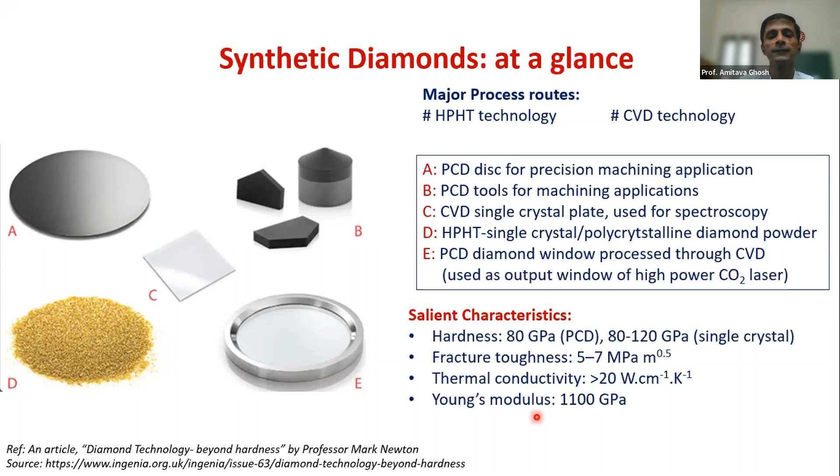More specific examples pertaining to today's lecture: you can see some of the cutting tools. Here are carbide tools, but at the tip of the carbide tools, the PCDs are basically joined.

You don't have to use the entire thing in the form of a PCD, because if you use the entire body as a PCD, the cost involvement is pretty high. So you just need the tip to be converted with excellent cutting capability.

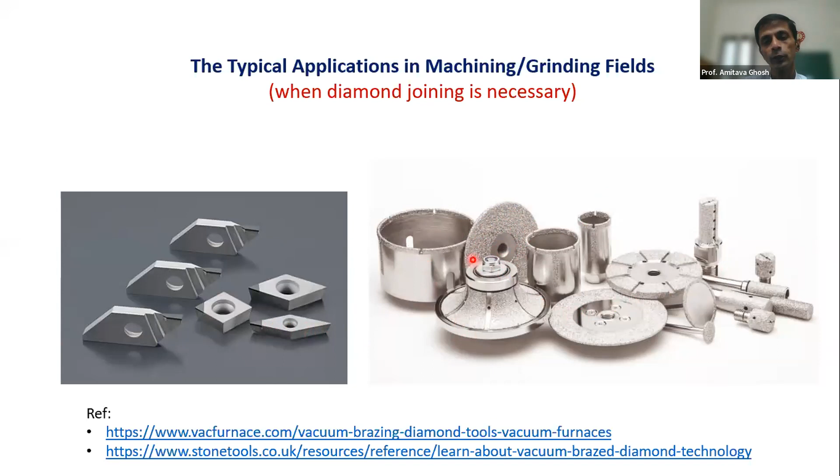On the right side, you can see several types of abrasive tools on which diamond particles are basically joined together. When we talk about this diamond joining, this diamond can be joined on a substrate in different ways.

Number one is very simple, ordinary chemical bonds, like a simple glue. There are a lot of extraordinary glues which can give a very good joint strength in ambient conditions. But when we use diamond particles as a cutting tool material or grinding tool, the involvement of high temperature will simply deteriorate the quality of the glue and it cannot hold the strength. So we cannot exploit the property of the diamond.

So we can also sinter diamond in a metal matrix. We can even press fit a large crystal of diamond onto a body of metal. We can use those kind of things in the dressing stick, which is typically used for grinding applications to condition the grinding wheels.

But apart from that, to make abrasive wheels like grinding wheels, two competing technologies are in the market: one is electroplating, another is brazing. Today we are going to talk about brazing. Unless and until we know what brazing is, we would not be able to delineate much detail about the assistance of laser technology into the operation.

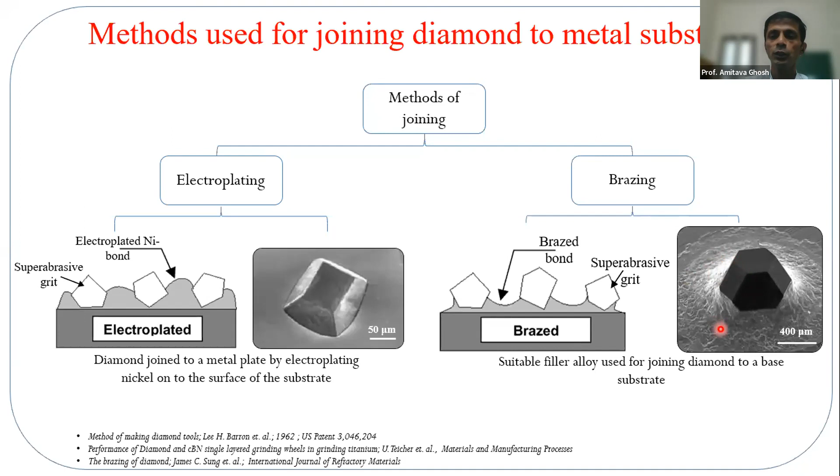In electroplating, it's simple: the mechanical joining of diamond particles to a substrate with the help of a nickel bond. The nickel is plated and it just covers a certain height. But in case of brazing, it's absolutely a metallurgical bond. So first of all, we need to know how we can really braze it.

For the brazing purpose, we need to understand the brazing system. So we are going to braze a grit with a substrate, usually a metal substrate. It can also be a cermet, which is basically a composite of ceramic and metal with a greater proportion of ceramic. And we have an alloy which needs to create a bridge between the grit and the substrate.

Depending on the source of heat, you need to melt this alloy. In the molten form, the alloy spreads on the substrate. It should react with the diamond, because unless and until there is a chemical reaction initiated between the grit and the alloy, it is very difficult to get the right strength.

Of course, to melt this particular alloy, you need a source of heat. We can have resistance heating furnaces, and we can have gas flames. We can have induction heating, and we can also use high-tech technologies like laser and electron beam.

We need a clear understanding of brazing before we see how laser can be a beneficial tool to take the entire brazing technology to a new high, where the process technology is advanced, product cost can be reduced, and cycle time can be reduced. So first of all, we focus on how diamond is brazed to a metal substrate.

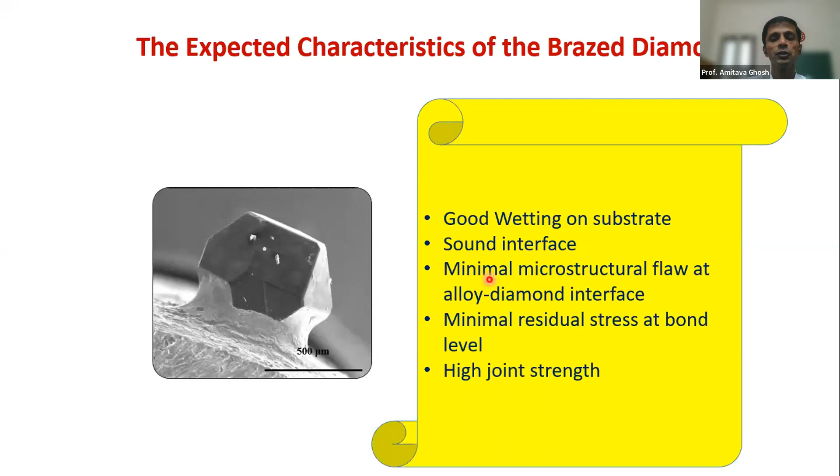And these things, as temperature is very much involved - say for example I choose an alloy that gets melted at a high temperature, it reacts with the diamond, but the moment I reduce the temperature to get the filler material solidified, what will happen? There will be differential contraction rates, so there will be residual stress. Let us look into those aspects.

First, I will present a case study of a very normal conventional brazing, which is industrially and commercially exploited to the maximum possible extent. That technology is nothing but high vacuum technology, which most of the time utilizes resistance heating as a source of power to melt the filler.

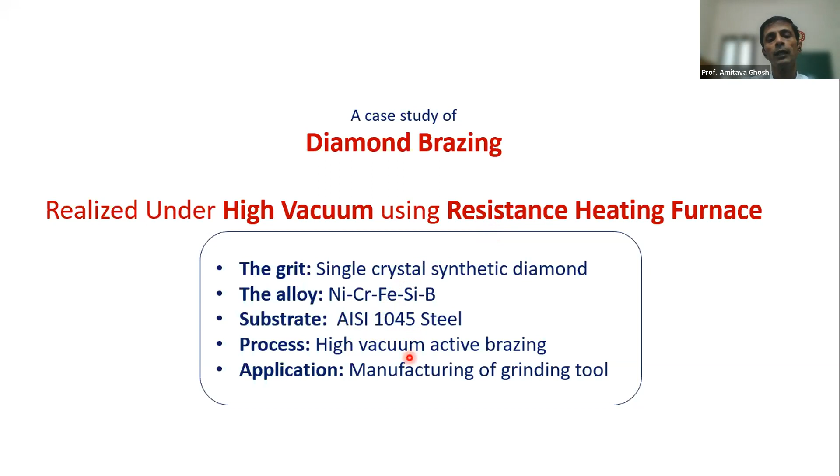In this case study, we choose a grit, which is single crystal synthetic diamond. The alloy is a nickel chromium alloy, which is quite hard when it becomes solidified. Substrate is just a medium carbon steel, and the process is high vacuum active brazing. I'll come to this high vacuum active brazing a little more in depth, then try to see how the laser can be beneficial. The application is basically manufacturing of the grinding tool.

As I said, there's a lot of metallurgy involved. We need to see how this filler material behaves when it joins the diamond with respect to the substrate. It is taken in powder form. Each globule you see is basically produced via the powder metallurgy route.

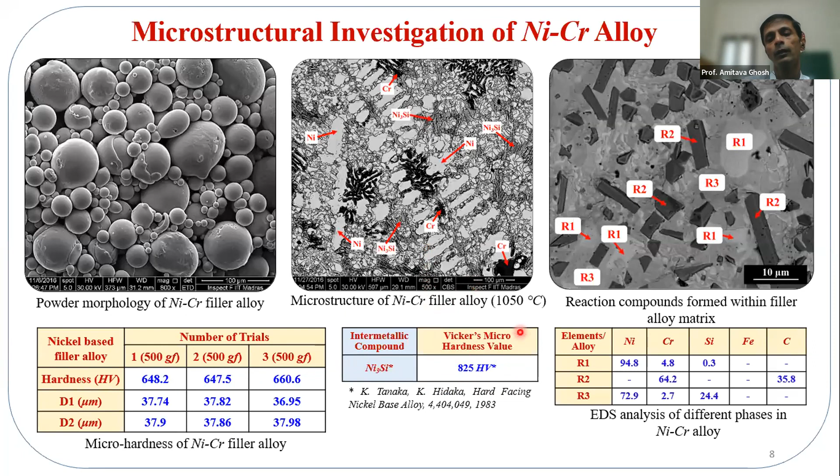When we melt it and analyze the microstructure, we can see nickel matrix solid solutions, some with chromium, but in the nickel matrix there are some nickel silicides which get formed. These nickel silicides have a tremendous hardness, about 825 HV, whereas the bulk hardness is around 650 or so. So the nickel silicide contribution alone is 825, with nickel being a much softer matrix. This presence makes the filler material, after solidification, much harder as well as quite strong. This is how it behaves when it solidifies.

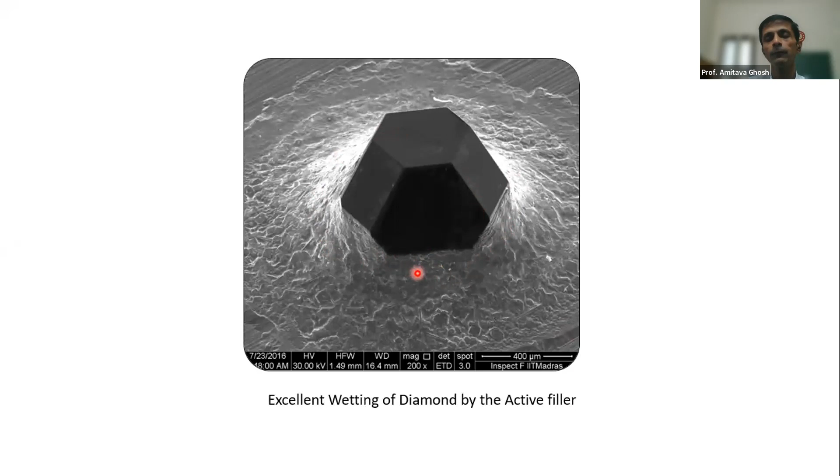Now, if you see after the brazing how the diamond looks, this nickel chromium alloy nicely wets the diamond surface. Apparently it's an excellent wetting, and the joint looks very sound, even under not-so-high resolution scanning electron microscopy.

But if we look into the joint critically, especially at the interface, we find there are chances of formation of micro cracks. These micro cracks are generally very detrimental.

When we try to see what exactly is happening, we wanted to reveal the microstructure at the interface. When we reveal it by etching this portion electrolytically, we see there is a phase called chromium carbide, and also a phase which is iron chromium carbide with a typical proportion of atoms. But these two phases are a bit semi-coherent with the matrix.

Because of that, when you solidify it, the stress level increases on this particular structure, and that exists exactly at the interface. This chromium carbide is further surrounded by the nickel matrix. Now, this chromium carbide itself is ceramic in nature.

When we cool the entire system from the high temperature, this nickel chromium alloy has a liquidus temperature, so I need to set the brazing temperature very close to 1000 degrees centigrade to realize the brazing. From 1000 degrees centigrade, we allow it to cool. When we allow it to cool, that induces stress because the diamond contracts at a different rate, the substrate contracts at a different rate, and in between, this alloy has to absorb that particular stress.

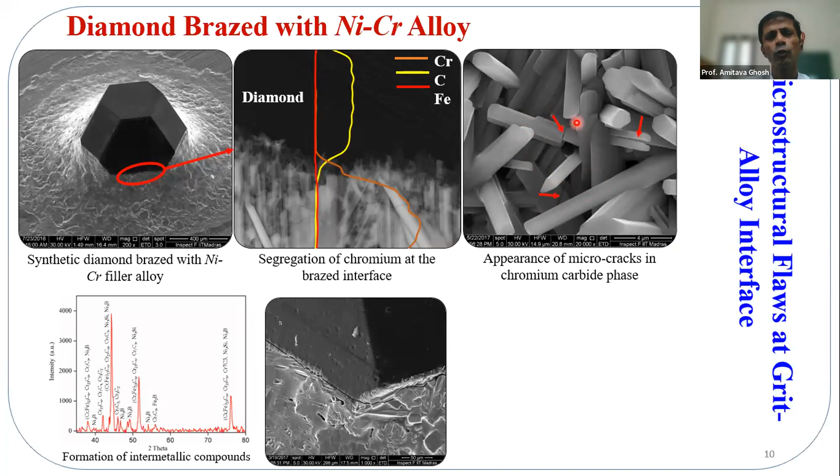As I said, that non-coherency and the typical very high hardness of the chromium carbide, as a result of or caused by the residual stress, gives rise to a crack. That's a very nanometric opening. As such, even with this crack, the diamond can sustain a very good amount of force, so possibly that is adequate to some extent from the perspective of a grinding tool.

When we tested the joint strength in our laboratory, we saw that this kind of small grit, a 700 micron grain, was struck with the linear motion of a carbide rod, and we saw it could withstand up to 81 Newton. Generally, grinding tools do not experience this much load, but this is the way grinding takes place, and the way we conducted the experiment, there is a difference because the grinding speed is much higher.

The impact is much more, even the failure takes place at a much lower load. This particular grain basically fails, and that fails not abruptly. It is always tending to fail at the bond level. The breakage takes place at the bond level because the residual stress is there. If you see the coefficient of thermal expansion between the diamond and the medium carbon steel substrate, there's a wide gap, and of course the Young modulus also has a wide gap. So as a result, when it cools, the residual stress is extreme.

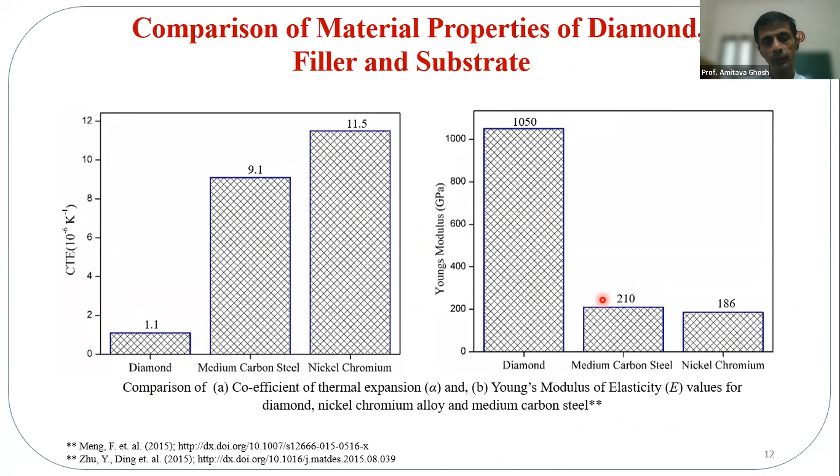We tried to map this, and we saw by numerical simulation that common understanding is justified, that is, the stress should be maximum at this particular bond level, and this stress is tensile in nature because it is cooling.

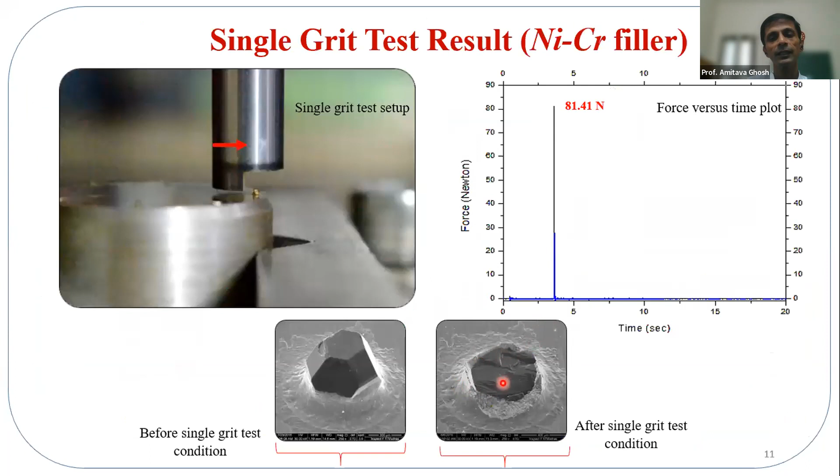Now, if we imagine that there is a load coming from left to this side and this way, what will happen? Because of the bending, this portion will be having additional tensile stress, so which will further grow, and whatever energy is spent here, it will simply cross the fracture toughness of the diamond, and finally the crack will be opened up here, and then it will propagate to the weakest directions, and finally we land up into failure like bond level truncation. So this is exactly what is happening, and this is how the brazing metallurgy basically works.

We wanted to control the cooling rate, and we saw, yeah, cooling rate also has some sort of effect. Some sort of effect in the sense, if it is very rapid cooling, then only it happens.

But let me just recap the process I'm talking about. I'm not talking about the laser processing here. I'm just talking about the commercial process which is adopted to braze the diamond, that is high vacuum, high temperature. So when we cool down from a temperature which is 1000 degrees centigrade, it takes quite a lot of time in the laboratory. It takes almost 7 to 8 hours to complete one brazing cycle.

Of course, because it's radiative heating, the entire environment inside the hot zone is under vacuum, so the only mode of heat transfer is radiation. But we can still control the cooling rate, because you can suddenly switch off the heat input to the furnace, or you can still allow the heat input to some extent, so that cooling rate can be controlled. Of course, we have seen that the cooling rate also has a tremendous effect. If the cooling rate is high, the stress level also will go high, which is not good.

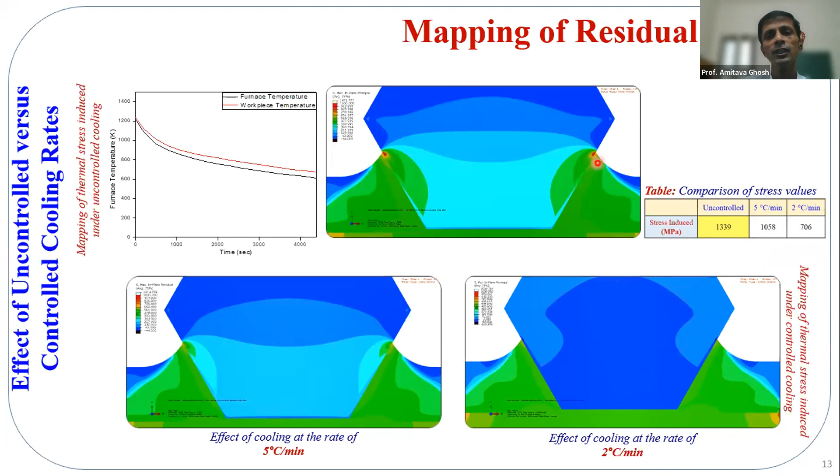So we thought about how to tackle this problem metallurgically first of all. And metallurgically, as I said, the root cause is the residual stress. We thought, why not use a filler alloy which is much softer, in the sense more ductile in nature, with adequate Young modulus, meaning it will absorb. It is more tough, we need it tougher, but at the same time it should be able to absorb, it should show more ductility. That means the strain at fracture should be much higher than the nickel chromium alloy.

And when we just used a silver-based active alloy with the presence of titanium as an active element, we saw that there is absolutely no crack at the interface. So this major problem, which is industrially found, could be resolved.

Now there is another issue I must share with you. See, we are using a silver-based alloy, and this silver-based alloy is quite soft. That is why it can withstand that stress, and it is not allowing any crack to initiate. Of course, here there is also an active element like titanium. Titanium is also reacting with the diamond, making titanium carbide at the interface, which is also almost ceramic in nature, but still, since the silver copper matrix around it is much softer, it gives much more cushion. I'm just talking in less scientific terminology, cushioning. But finally, what happens, the main thing is the absorption of the residual stress is much more efficient.

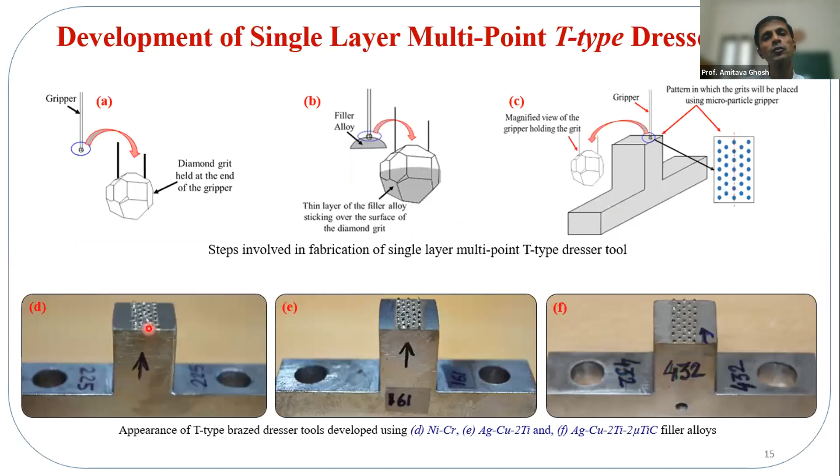Why am I telling all these things? Because if we understand the manufacturing perspective, we can really make out how the laser can be extremely beneficial if we just come out of this conventional mode.

So this is how these dressers are tested. The grinding wheel is rotating. The dresser is mounted on a dynamometer, which measures the force, and then we allow it to dress the grinding wheel at different conditions. And then we see if the diamond grits are dislodged or not.

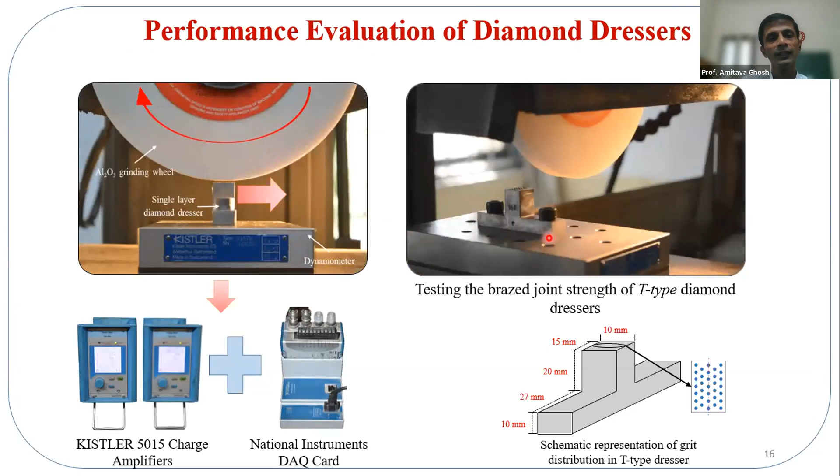So we first need to have a paint, and on that you plant the grits, and then you have to go for the brazing. We are talking about active brazing, with a filler, to be realized under very high vacuum. And the entire process technology, since it is happening under vacuum, is actually very time consuming.

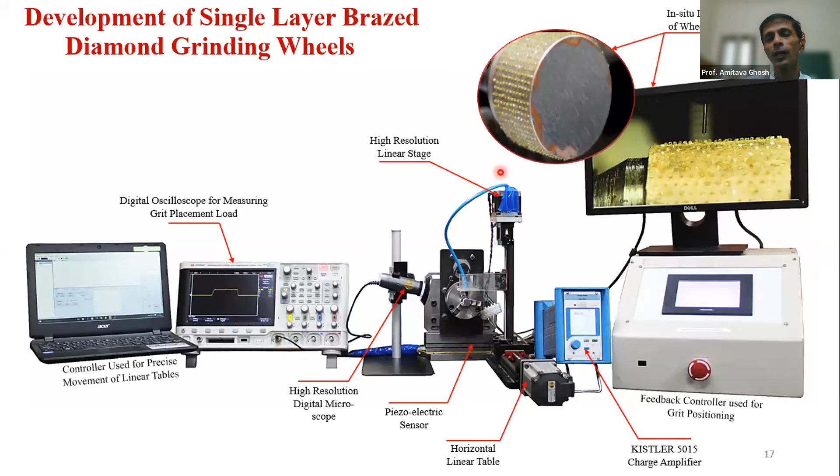Second product is a small grinding wheel, as I was talking about. You can see the grits are nicely placed here. Not only that, this technology enables an operator or manufacturer to place the grits with uniform heights. That is the advantage of the active brazing technology we have developed here.

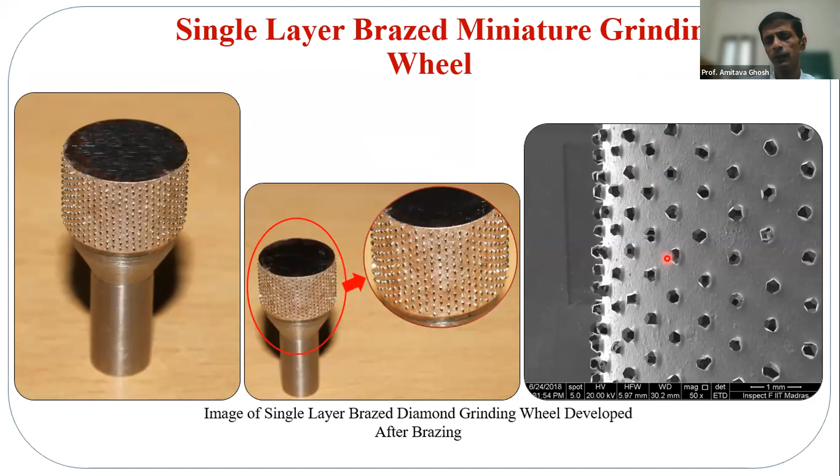When we test such tools during grinding, we have seen the strength is pretty good. If we replace the nickel chromium hard filler alloy with a softer matrix like silver, the tool life is improved by quite a few folds. These tools are also supposed to rotate at high RPM, and this technology is quite capable of withstanding all those issues related to high-speed grinding.

But if we use silver copper based filler, we can reduce this kind of failure to a greater extent. If we use the ceramic matrix, a similar order of failure can be maintained, but we get a bond which is much more durable in nature. So this is all about the conventional approach. We also tried to make a very large diamond wheel for grinding. Normally the grinding is done with just 30-40 micron depth of cut.

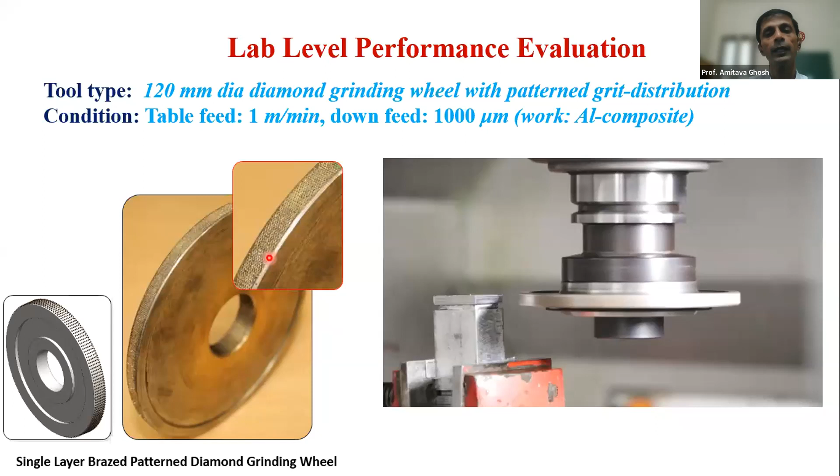But the bottleneck here involves two things. One, it's a high temperature process. Although it is 1000 degrees centigrade under vacuum, it is still prone to graphitization. Number two, we are doing this brazing operation under a vacuum furnace, so going from 1000 degrees to ambient condition takes a huge amount of time. Altogether, a brazing cycle that starts in the morning is just unloaded in the evening, so it's not very productive from that perspective.

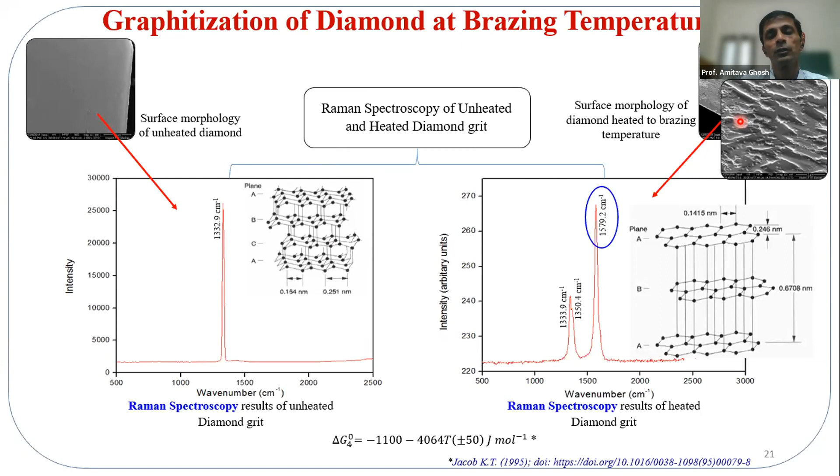Can you not do it very fast? Possibly laser technology can do wonders and show us some direction. So people started working on laser technology, using this lasing operation to see if diamond can be brazed successfully. The question arose in the mind of researchers: can it not be taken to a new high with the help of laser brazing technology?

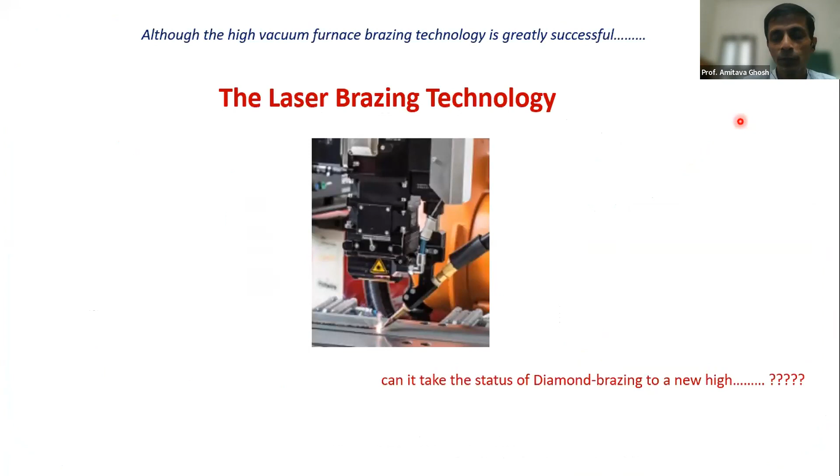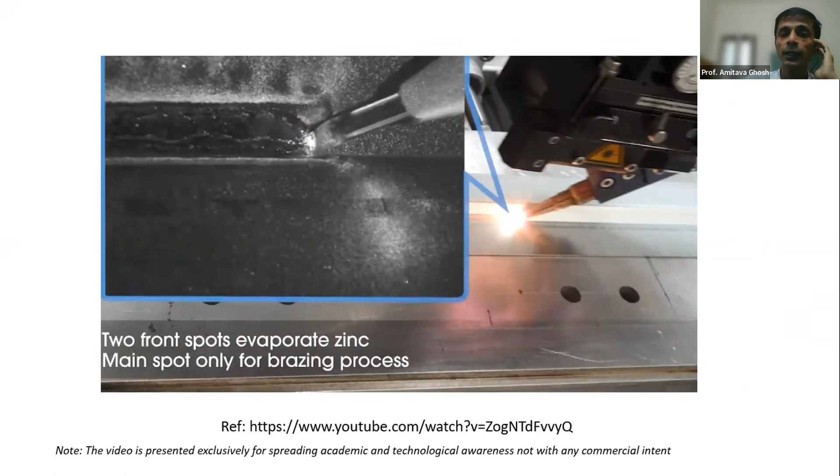The immediate advantage with laser brazing technology - you can see a quick glimpse in a video. This is a commercial video, with no commercial intent, just to show that the lasing process is so fast. It can be so sophisticated today, and it can be nicely automated - absolutely robotic control.

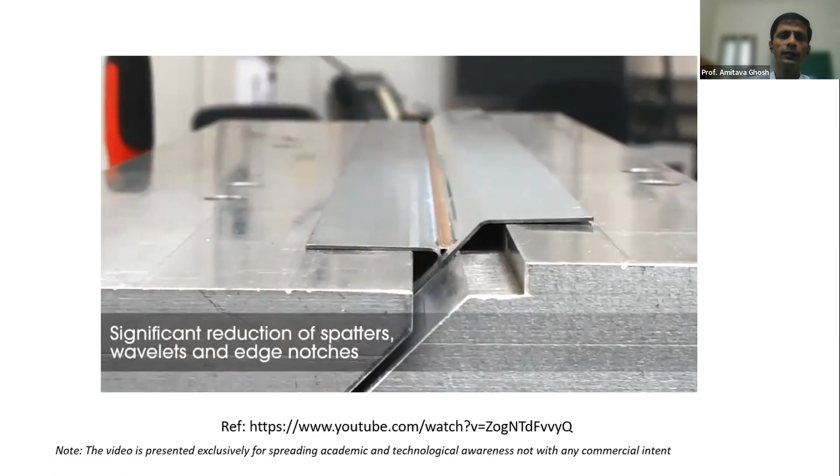So this is two plates of an automobile roof. Typically, this kind of laser brazing is carried out on automobile roofs, and here it's just an industrial prototype to demonstrate the process. You can see the use of multi-point laser - actually it's a trifocal lasing operation.

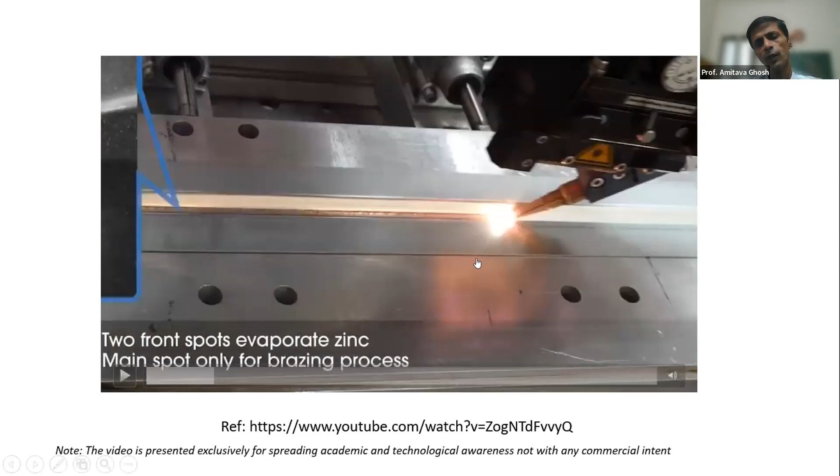You have two frontal laser beams which simply try to preheat the sample. This particular plate being brazed is actually zinc coated, so you need to ablate the zinc - those two beams are used for that. Then the mother or primary laser, at the center, is used for melting the filler alloy. That is how it happens.

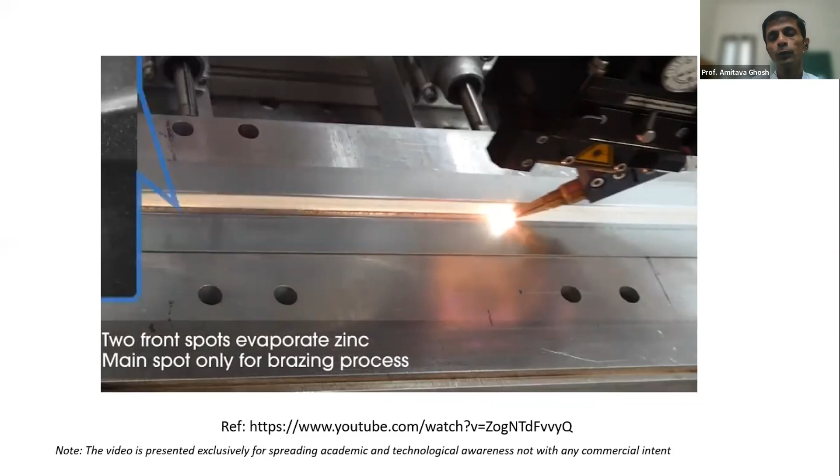I wanted to show these things just to give a feeling of how fast the process is, and how sophisticated it can be. It is a brazing process, so can it not be extended for diamond brazing too?

So the immediate advantages I tried to note: no bulk heating, it's very localized heating. Imagine if we do things under high vacuum with resistance heating - there's a hot zone heated up with radiation heating, and whatever things are there will undergo bulk heating, so lots of energy is spent. Here in this lasing operation, we have low heat input, low power consumption, localized heat, and precise control of operating parameters like laser peak power, intensity, fluence, pulse width, pulse frequency, and above all, operation flexibility and scope of automation, which altogether makes things very, very fast.

Our major objective: can we not make the things very fast? Yes, the research community initiated these efforts in the last 10 years. Some works have been going on, and this is just a couple of case studies I will present in sequence.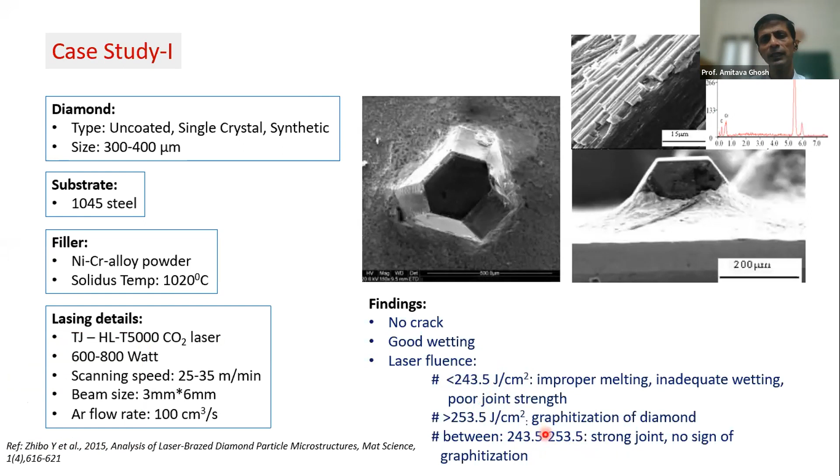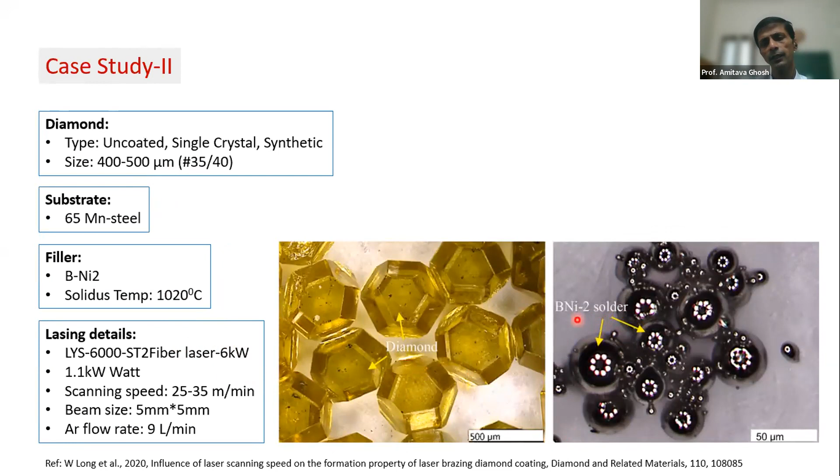There was another case study with the same alloy, this time with a fiber laser and the same solder material, nickel chromium. Obviously the chemistry of the joining is the same as what I explained during the brazing under high vacuum and resistance heating technology.

Here you can see they wanted to make a cluster of diamond along a certain width, just by changing the speed. So the scanning speed matters a lot, because depending on the scanning speed, the specific energy changes, meaning the energy concentrated on a particular area changes.

When we increase the speed, we have seen that if it is very low, it is detrimental. This work was done by W. Long in 2020, a quite recent paper. They found that a speed in the tune of 3 to 4 millimeters per second is good for the quality of diamond brazing.

This entire process is not done under vacuum, it can simply be carried out under an argon atmosphere. Of course, the vacuum brazing we talked about can also be done under argon, but that has extra hazards, because although we use very high quality argon, the time involved in that entire process is pretty long, whereas here the time involved in the brazing is pretty short. This does not allow the diamond to degrade much chemically.

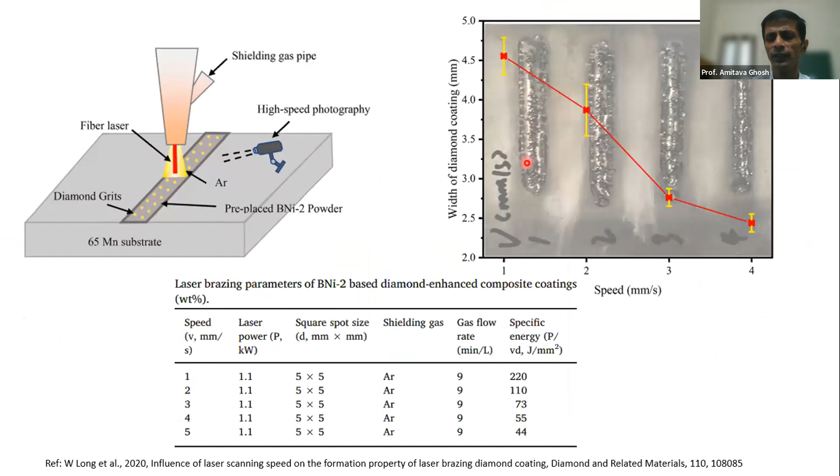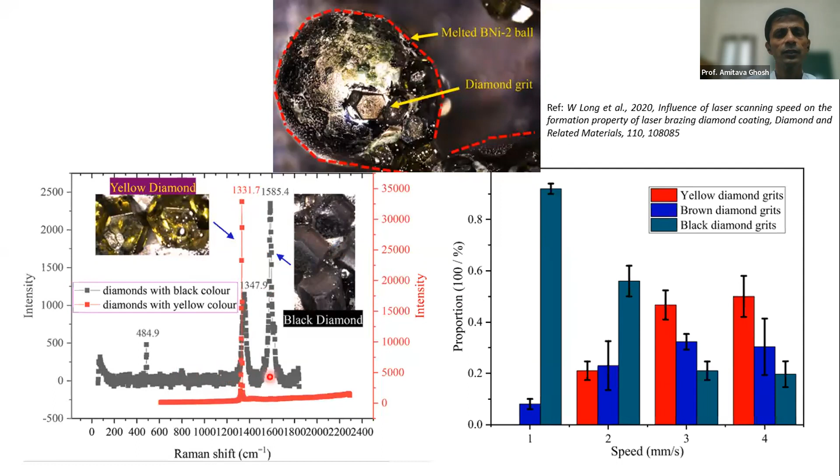On any track there are a number of diamond particles, so they counted how many were yellow, brown, or black. It was observed that the number of black diamond grits is pretty low in the case of high speed, because graphitization cannot be completely avoided. The red color indicates the presence of pure diamond, while the other indicates the presence of diamond along with graphite. A salient observation noted was 3 millimeters per second and 73 joules per millimeter square specific energy.

Graphitization could not be avoided. It was more or less present in all cases. Width, of course, can be controlled, and that can also be controlled by the scanning speed.

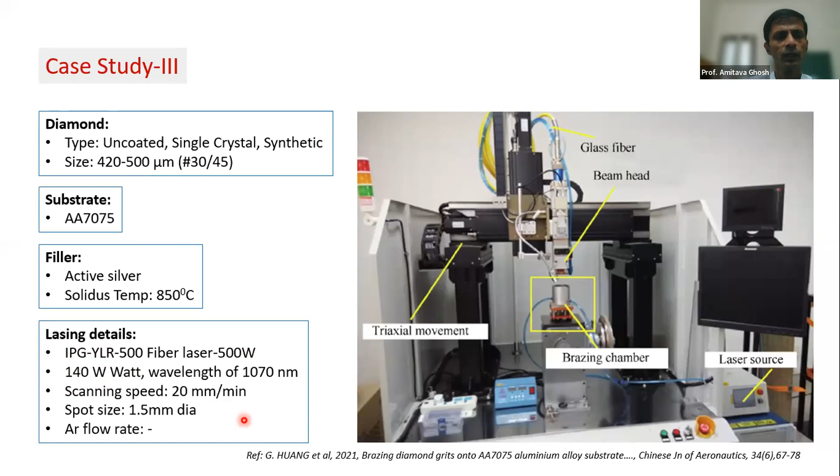There is another study where diamond was joined with aluminium. Many grinding tools are made of modern-day aluminum alloys, which are pretty advanced and can sustain the grinding loads involved. The 7075 alloy is even used for making resin-bonded wheels, so the group attempted brazing diamond with this particular alloy. They used a fiber laser of 500 watt, though utility of the power is restricted to 140 watt, scanning speed of 20 millimeter per minute, spot diameter of 1.5, again in an argon environment.

They found the brazing could be done successfully. The diamond is nicely brazed with the filler, with good wetting, and the alloy is also fused with the aluminium nicely. So it's almost like a hybrid joining: brazing takes place between the diamond and the filler alloy, while between the filler alloy and the substrate it is almost like welding aluminium, because the melting point of the filler is above the melting point of the substrate.

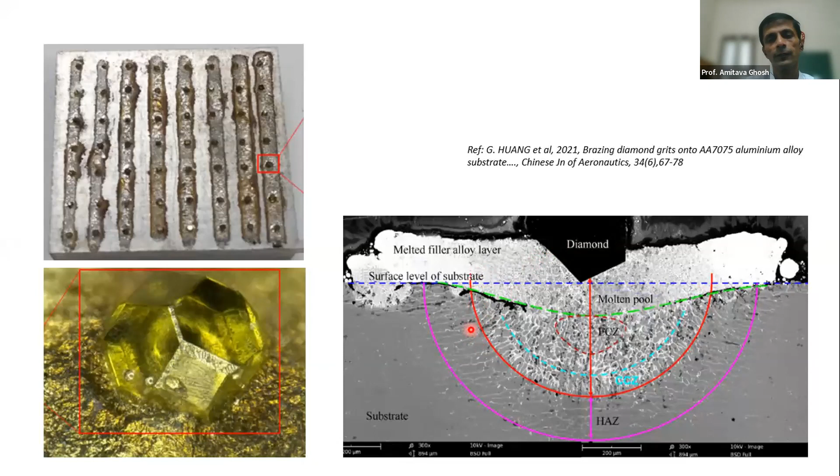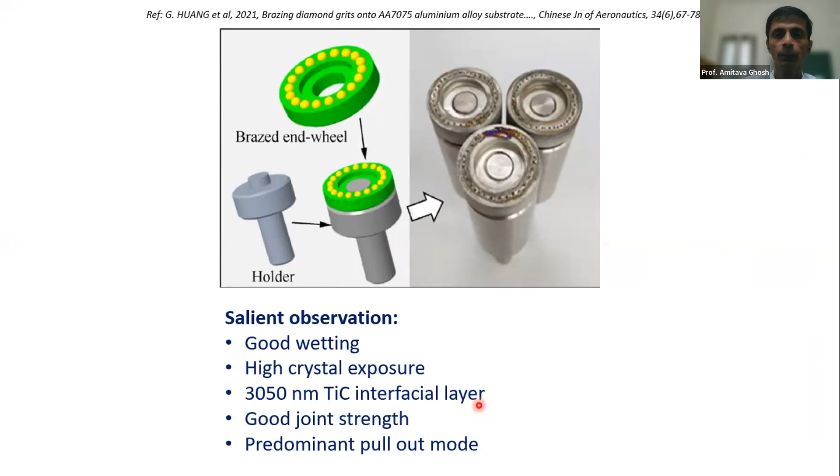The research group manufactured some tools through this process and observed that joint strength is pretty good, with the failure mode majorly being pull-out rather than breakage of the diamond. These results indicate that the fastness of the laser process can be utilized much more productively for making such tools.

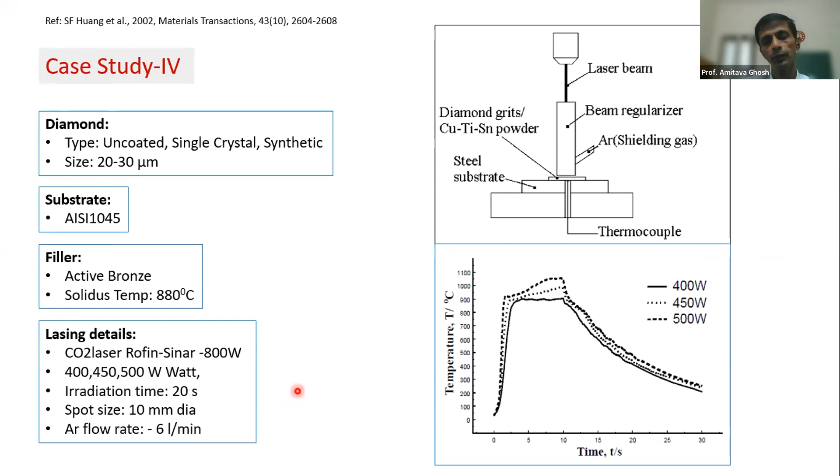This is again a CO2 laser used to see the effect of different wattage, again done in an argon atmosphere. It was observed that the grit abrasive particles are well retained on the substrate matrix, and the reaction product at the interface, such as titanium carbide, forms a discontinuous layer, which is good for reducing residual stress. At the end, when joint strength was tested, it was found adequate for the purpose it was made for.

But here, as I like to mention, the laser is basically focused on the top, and most of the time the diamond is exposed because the laser passes through it. Because of that, there would sometimes be cracking on the diamond, and graphitization is also taking place.

So another attempt was made where the group wanted to introduce the diamond through a nozzle from a side direction, so the laser would not interact with it for a long time within that small millisecond time span. In all these attempts, the pulse width reported is just a millisecond when using pulsed lasers. Otherwise, the scan speed should be such that the irradiation time on a particular grit is well controlled; it may not be in milliseconds but on the order of a few 10 to 20 seconds. There is another work that noted a diamond crack in just one second.

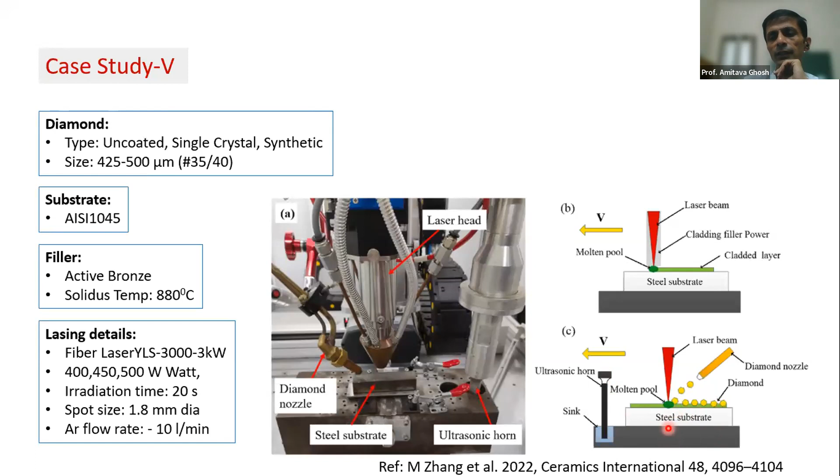Additionally, this group tried introducing ultrasonic agitation onto the substrate. With ultrasonic vibration introduced, they observed more uniform mixing of the alloy with the intermetallics being formed. They saw that the interfacial reaction layer, using a copper-based alloy here—a copper-tin alloy—formed tin-titanium intermetallics and finally titanium carbide, with much better mixing. The titanium carbide interlayer was much smoother, and the intermetallics formed were much finer in the matrix. That is the way it happens, and it is nicely done.

And if it is assisted by ultrasonic vibration, it has been observed that the wetting is much more improved, and whatever possibility of cracks, that can be eliminated even more efficiently.

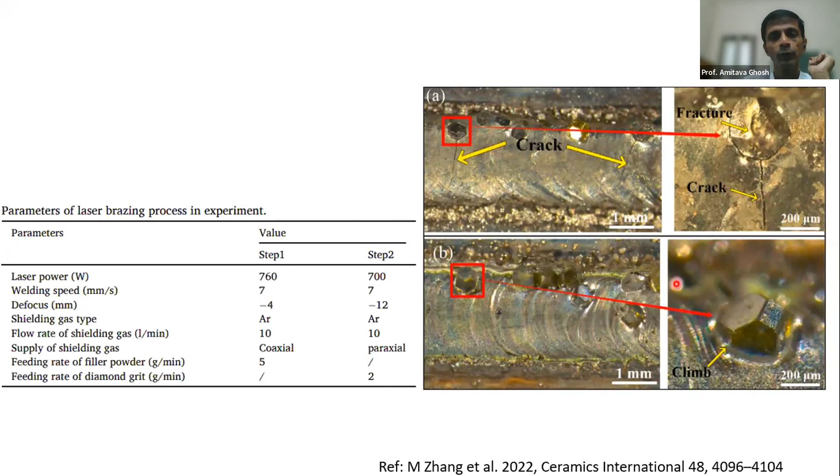So this is in brief about laser brazing, how it is done. Now let me try to summarize the takeaway points.

If I adopt laser assistance in brazing, the very first immediate benefit is the rapidity of the process. The production cycle time, instead of a few hours, is just a few seconds, or maybe for a tool, just 10 to 20 minutes, depending on the size and shape of the things.

The small wheels I've demonstrated, manufactured in our lab, can be made in just 10 minutes. Since we are trying to place the grits in a coordinate-controlled manner, equispaced, in a very nicely arrayed manner according to a custom design, this can be done perhaps by the laser much more efficiently. Nobody has done this yet, but the scope is wide open.

But the bottleneck that has been noted is that since the interaction is there with a very high amount of peak power, the localized temperature goes up much more than whatever is required. That is how researchers so far are reporting, but perhaps we need to control that.

That can be controlled much more efficiently if we replace a continuous wave laser with a nanosecond or femtosecond pulse laser, by controlling the peak power, the pulse width, the pulse frequency. If we can really do that, we would be able to avoid whatever graphitization is taking place, and the interface can be made much more smooth, uniform, and stronger. That is the takeaway from the reported literature so far.

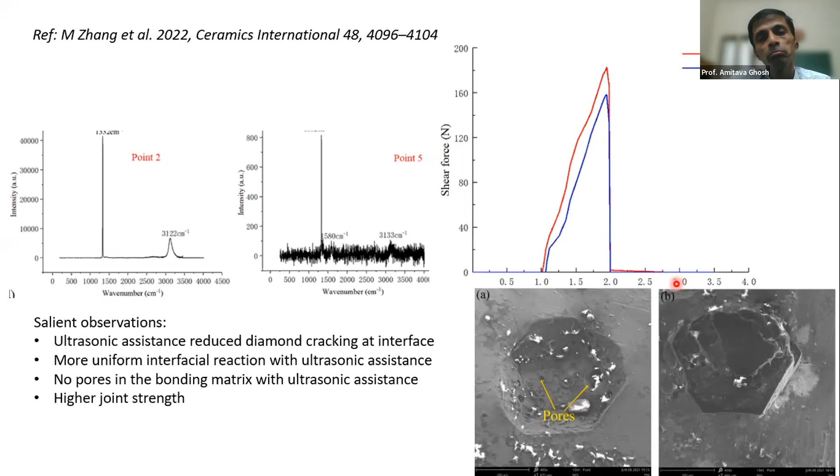But what I'd like to conclude is that the way ahead is much more glorious, though we're just walking the path. I think in the next 5 years, laser technology will simply add quite a lot of value to the commercial market for manufacturing abrasive tools.

Okay, this is another study, again playing with the frequency and the pulse width. People have seen that if the overall energy per unit area is controlled, the diamond can be better protected. So this is again just playing with frequency, pulse width, and wattage.

There are other applications also where laser can be used to make abrasive tools. We are talking about abrasive tools here. There is a rigid bonded wheel whose surface can be textured in a very nice manner with the help of laser, very fast and efficiently.

This kind of texturing is necessary because the wheel, during grinding, has to accommodate the chips, and it has to make the cutting fluids work very effectively. Otherwise, in grinding, because of the very intimate contact, the efficacy of the grinding fluid is not always properly realized. This is another, different way of making an abrasive tool.

Here is a micro tool. If I just want a 1 millimeter pin and on that I want to braze diamonds, it's quite challenging, because the diamond crystals would be particles of just a few 10 to 20 microns, and even those particles need to be joined, which becomes a little critical and tricky to realize a successful joint.

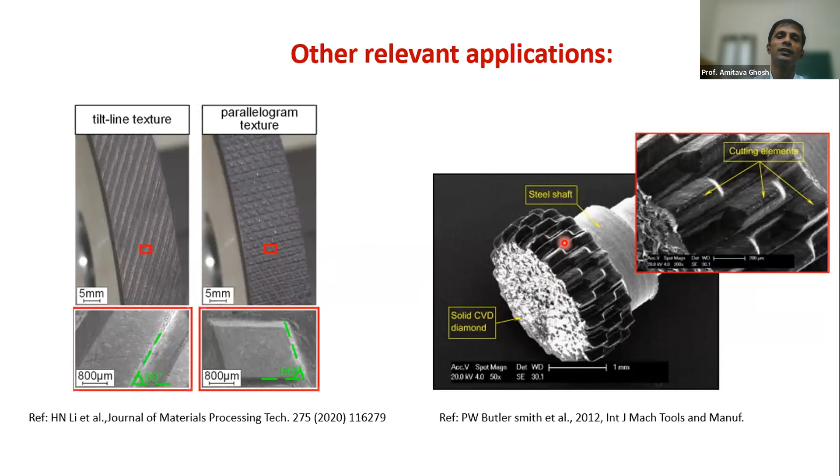So this is how laser technology is assisting us in making diamond tools. I think with that, I want to conclude. I think my time is, perhaps I've overshot a little bit.

So, in summary, bottom line, the process is evolving. Scientific understanding for high quality joints is not yet well understood. Unless and until we do that, we really cannot realize it in the form of a successful product. No report so far, as far as our research found, reports a commercial application yet. So there's a huge amount of scope lying in front of us.

And it has a tremendous future considering its low power consumption, and of course, because the main thing is it's a very fast process. It can reduce the production cycle time to a very appreciable extent, so that we get a commercial benefit of it. With that, I thank you. Thank you, audience. If you have any question, you may please ask.

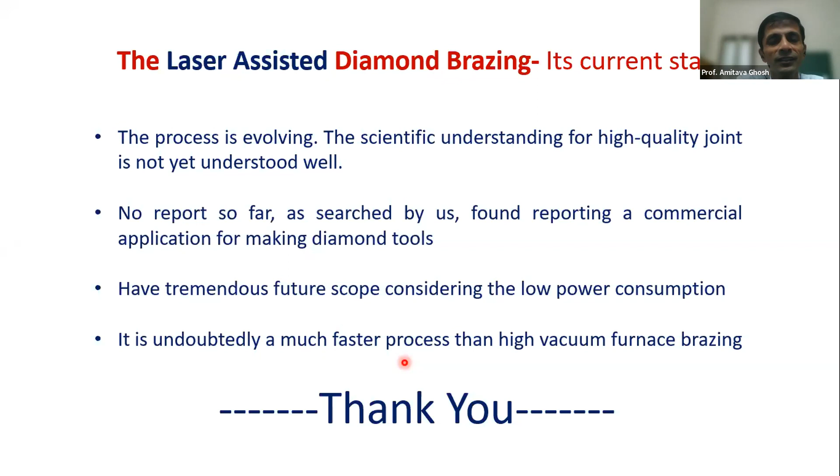So thank you, Professor Ghosh, for a wonderful presentation. I think that's the first comment presented from the audience. He said it's an incredible presentation. I can't agree more on that.

So probably before I ask questions on behalf of our audience, I would like to first say, today, before I joined the webinar, I thought we have you and also Professor Krishna from two different backgrounds. One, because I'm an engineer as well, we could say we are engineers, and Professor Krishna could be a scientist. However, after hearing your presentation, it seems you are an artist as well, making such very fine microstructures, very fine materials. It's just like art. So I really would like to first congratulate you on doing such wonderful research.

So we do have a couple of questions from our audience. The first one was, in the case of laser-assisted brazing, what are the possible areas where HAZ will be formed, and what will be its effect on the strength of the tool?

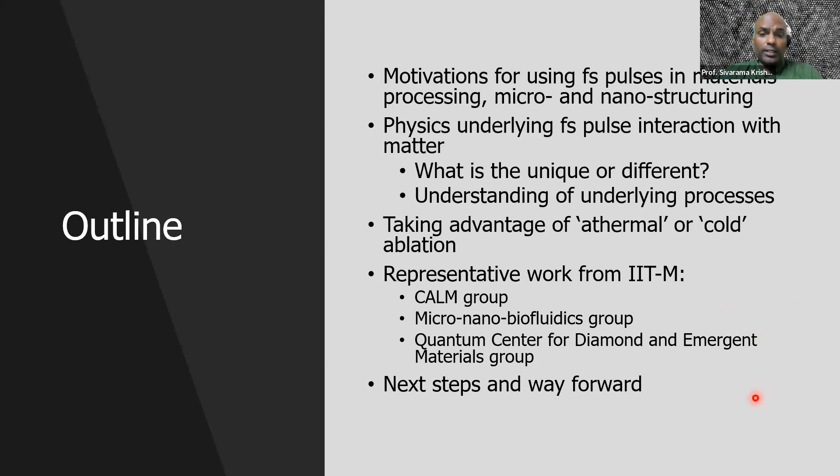Femtosecond pulses are also very good for welding, especially on the micro and sub-micro scales. In the second half of the talk, I will showcase representative work with colleagues in the CALM group, the MNBF group, and also the QC DEM group, and maybe also indicate some directions for the future.

So what indeed is the motivation for femtosecond laser microstructuring and for applying femtosecond pulses to this area of work? One of the key reasons, or maybe the reason, is precision. Of course, machining is synonymous with precision and probably even control, but mechanical engineers know this best. I pick on this important word, precision, and I hope to convince you that femtosecond pulses are ideally suited for this.

For many other applications, probably they are not as well suited, but there are very well suited lasers on the broad template that we have. One of the key advantages of femtosecond laser pulses is that they provide almost a single platform to work with soft and hard materials. This, if one thinks about it, is somewhat unique. Probably not every tool is very well suited to interact and modify soft materials as well as hard materials without a significant change to the platform itself.

But femtosecond laser pulses can indeed play the role of a one-stop solution for soft materials such as polymers, plastics, and so on, as well as, and it has been demonstrated, ideally suited for microstructuring really hard materials like diamond and important materials such as semiconductors and others.

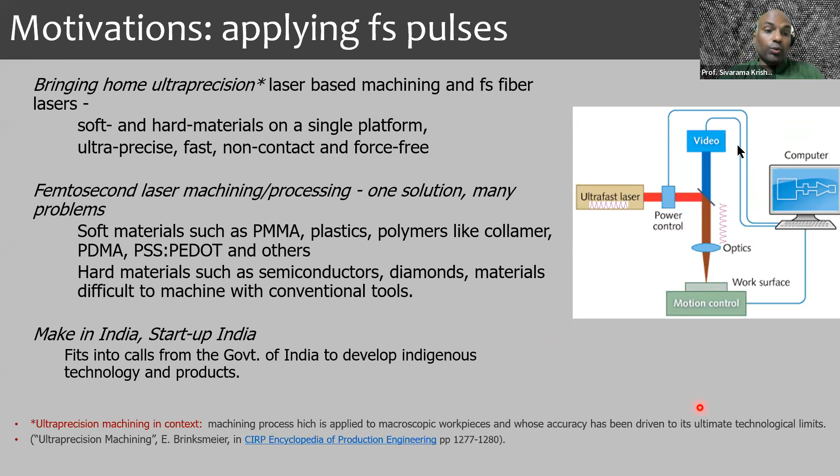So why use femtosecond pulses for materials processing or structuring? Essentially because, like all laser tools, primarily it is non-contact. It's a very flexible tool, as I will hope to showcase. In many cases, it even plays the role of a single step and sometimes even a single pulse or single shot tool. And it brings in very unusual degrees of precision, especially for laser-based techniques.

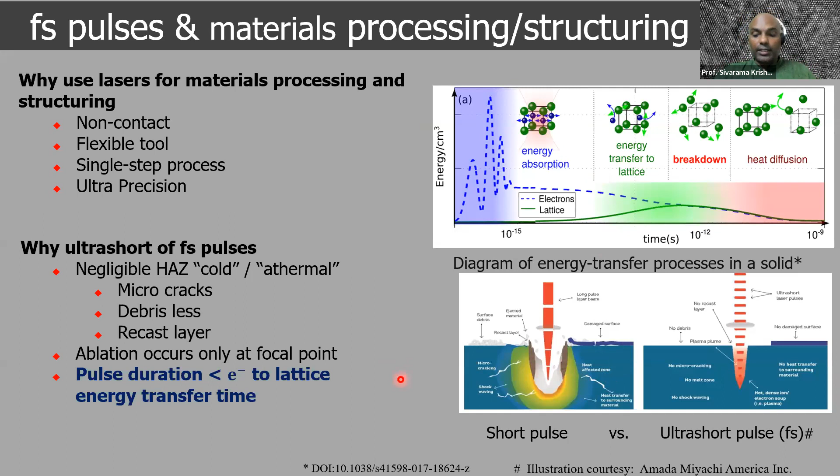The outcome or effect that is very desirable in our case is this very popular view graph, which we have sourced from this web page, but several laser companies and laser micromachining manufacturers like to showcase this on their website. Essentially, on the left is a typical nanosecond or continuous or long pulse laser beam interacting with a surface and subsurface volumes in a typical material. Let's say this is a hard substrate like silicon, diamond, or whatever. One could also think of soft materials like polymers. And on the right half of the view graph is ultra short, or femtosecond, or I would rather call them sub-picosecond and few-picosecond pulses interacting with the same material.

This cartoon essentially shows that a whole lot of heat-affected or thermal damage occurs in the case of long laser pulses. This is because, apart from everything else, these pulses tend to heat the local volume a lot and start melting the system, which is not always what we want. If I want to remove material, I'd want to ablate or extrude material from a certain voxel, a volumetric pixel, a three-dimensional pixel if you wish. But long pulse lasers don't do just this—they also damage the material in the sense that they melt it and so on. I'll show you some view graphs where this becomes extremely evident.

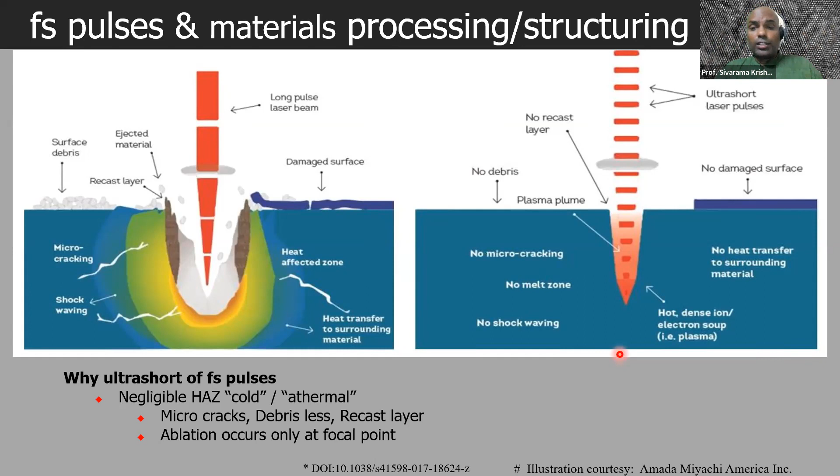Why they do the ionization very well is something I'll try to convince you of through a few back-of-the-envelope numbers. This stark difference—one being a largely thermal process, the other a largely athermal process—is essentially due to the fact that the time duration for which a laser pulse interacts with matter is very important to the way energy transfer takes place between the light field, radiation field, or electromagnetic wave, and the medium.

On very short timescales—a femtosecond is 10 to the minus 15 seconds, a picosecond is 10 to the minus 12, and a nanosecond is 10 to the minus 9 seconds—energy is absorbed, and on sub-picosecond timescales, the energy really remains with the motion of electrons. One can think of this as electrons getting excited. On picosecond timescales, the lattice, that is the atoms themselves, start to move. Of course, if they have to move, we have to give them some energy—that's essentially Newton's laws taking place, although these are quantum mechanical systems. On picosecond timescales, we tend to push atoms.

On longer timescales, heat diffusion tends to take place from the region where the heat source is placed onto extensively larger volumes. If I use very short laser pulses, predominantly these pulses interact only with what we may call the electronic degrees of freedom—they talk to the electrons and maybe to some extent the lattice, but they don't break down or heat up the system extensively. This is a cartoonish but fairly accurate way of describing why heat-affected zones and femtosecond laser pulses interact with matter in a rather cold or athermal way.

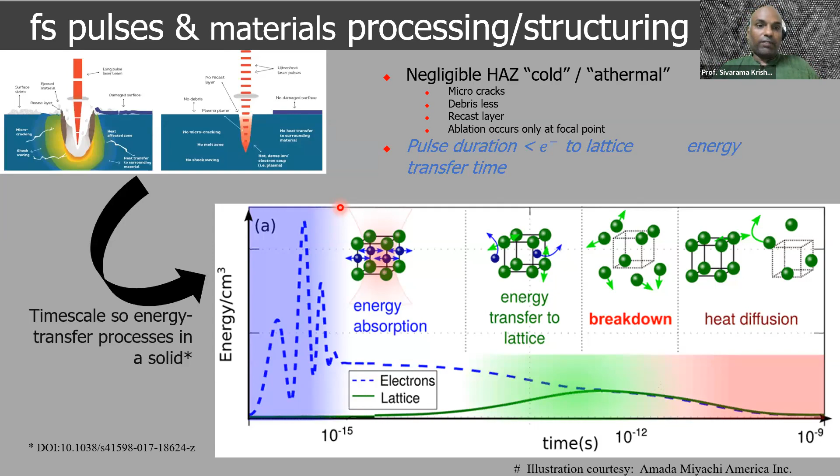The much more underlying physics also has to do with the nature of the plasma formed here, which I won't elaborate on extensively in this talk, but rather I'll showcase the consequences of this unique form of interaction these pulses have when engaging with materials, as against all other forms of laser pulses or continuous wave lasers.

In the rest of this talk, if you're still not convinced these advantages exist, through our own work done in this lab together with several collaborators I have the pleasure of working with, and whom I cited earlier, we use the facilities available here—the femtosecond laser system, a micro-machining end station—and I actually work, as Professor Kong sort of guessed, on the physics of laser-matter interaction, which is a physics-oriented study.

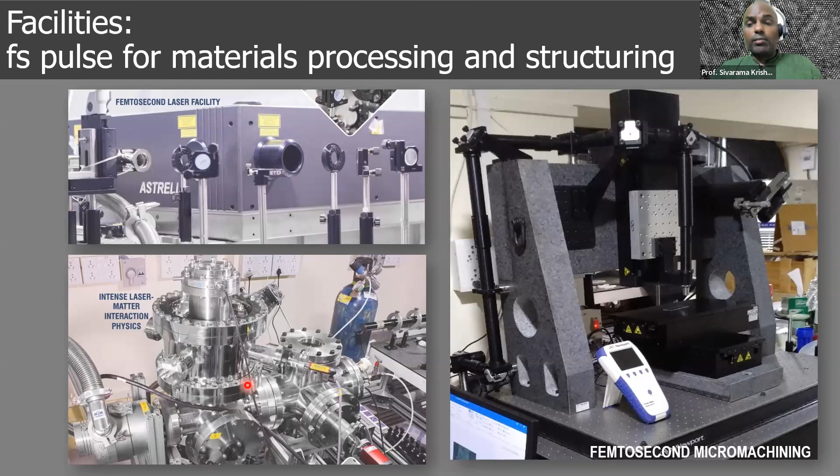This is the system that we use for that. It's an ultra high vacuum system, entirely home built, with a time of flight mass spectrometer to study ions and also electrons, which are emitted from these laser matter interaction scenarios. But I'm not going to go into those aspects in this talk owing to limitations of time. We can discuss this maybe at the end or through emails.

Now, a few numbers which would hopefully convince us that these lasers are ideally suited for the kind of work we are going to showcase here. This black box right behind is the laser system, an Astrella laser from Coherent, an American laser vendor. This is a typical titanium sapphire femtosecond laser with the shortest pulses being 35 femtoseconds, but we tend to use longer pulses. Each of these pulses can have a maximum energy of 6 millijoules.

It sounds rather small, but I'll hopefully convince you that this is more than sufficient. These pulses are fired repetitively in a time series with a repetition rate of 1 kilohertz, fixed in the case of this laser, giving an average power of 6 watts, that is 6 joules per second. We typically focus these down to spot sizes of about 5 micrometers, which may be slightly on the lower side. Realistically it could be like 10 micrometers, but that depends on the focusing element or microscope objective we use.

The peak power, essentially the energy per unit time at the maximum, although each laser pulse seems quite delicate at just 6 millijoules, because these are sub 100 femtosecond pulses, it is huge. We have about 60 gigawatts of peak power in every laser pulse.

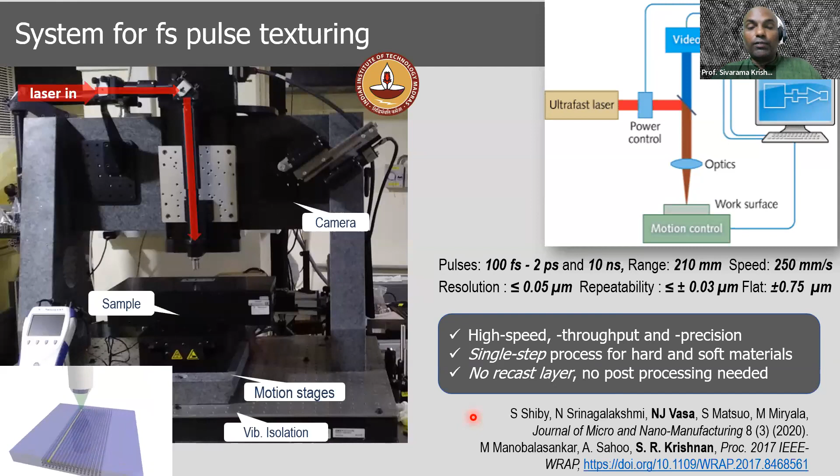This is a master's student, Mano, who is soon to graduate, and I will showcase some of his work. He is laying his sample into the micro machining end station.

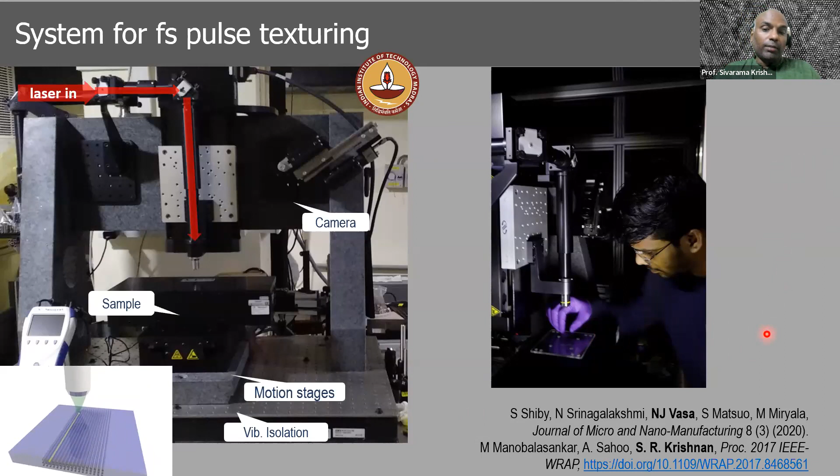So what did Mano do? This is the first short story of this presentation. Mano was one of the first students. He, along with Anubhav Sahoo and other students, essentially took up the work on micro machining. Anubhav Sahoo himself studied more the physics of the laser matter interaction process and some nanoparticles, which he synthesized using these pulses, and also did time resolved spectroscopy. But Mano's work, he essentially wanted to get the best working conditions and best features that are possible.

So he drew grooves using the ablation of femtosecond laser pulses. You can see that a pair of grooves is written using this laser as a scribe. So there is a pair here, and these two grooves are coming close, and he wanted to try and optimize these grooves and bring them as close to each other as possible and determine a sort of pitch for these grooves. And he determined that we can space the two edges as close as about 2.5 microns together without destroying the integrity of the grooves and maintaining substantially good linearity among this. So this would, as one can imagine, be relevant for grating-like structures and writing microfluidic channels and writing perhaps even waveguides for applications, right?

So this was first proof of principle work. It was a few years ago, and we were really excited to see that we are able to do this. This also talks about the excellent quality of the translation stages we have.

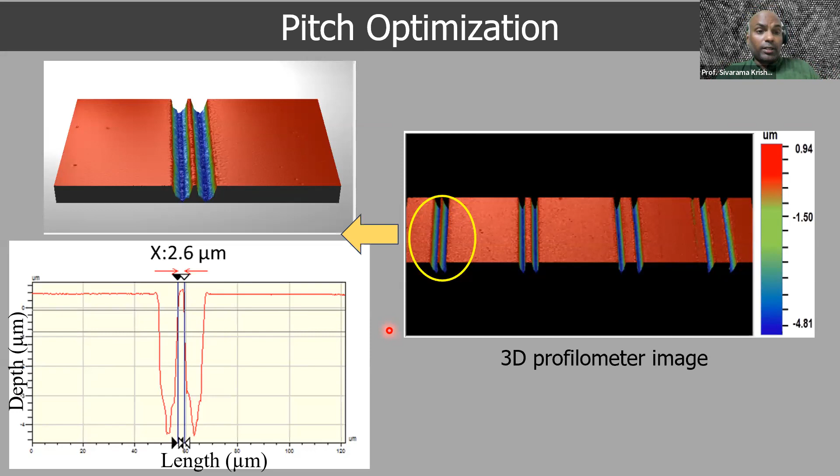But then one of the first pieces of research, which was fairly successful, and Mano came up with this looking into literature, is to enhance the smoothness of these grooves, which is to say that reduce the roughness in as few a number of passes as possible.

In ablating material, he took the most common material that one would want to do, one of the most common, which is silicon wafers, and under identical conditions, he ablated the silicon wafer in air, that's ambient conditions. He immersed the silicon wafer in propanol, in isopropanol, a very common solvent, then in methanol and in ethanol, and under identical laser scribing conditions, scribe these grooves by ablating the material and then examine them under a non-contact optical profiler. Seeing is believing, and the proof of the pudding is right here, in that we get very smooth profiles when we immerse these samples under a suitable solvent.

Well, that is one of the alcohols. And in fact, we found that there are small differences between the different alcohols, and methanol somehow seems to perform the best. In one sense, this sort of rugged, ridge structure with this very ill-defined surface is formed in air.

Because of the fact that even in the femtosecond machining process, there is some debris, and unless we have a nice way to remove the debris as the process is happening, it's not going to give us the best results. And the liquid sets up a convection, and that convection takes away the debris efficiently, and also seems to regulate the thermal balance in the process well. It's not something we completely understand. We are actually taking to some modeling of the process using COMSOL, which is still work we are going through, and hopefully we'll have some results to report about that.

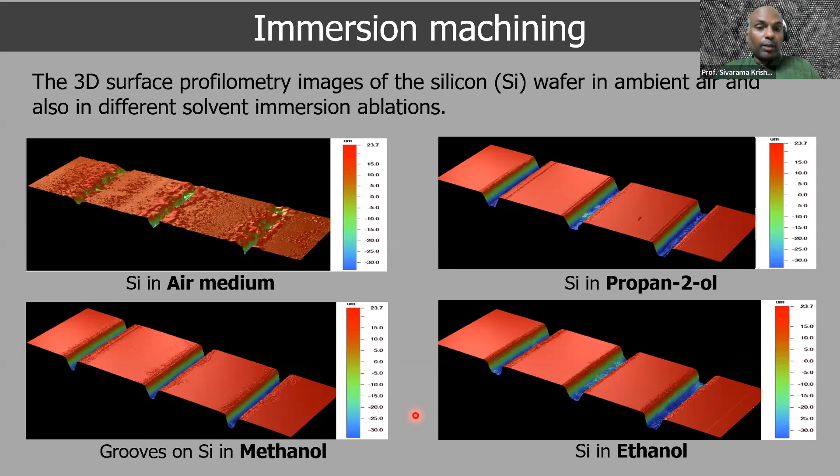Now, one of the important cornerstones of Mano's work is that he also took very unusual materials which have probably not been used to process with femtosecond pulses, such as cobalt chromium alloys and cobalt iron boron alloys, which are really hard materials, medically important materials like cobalt chromium, which are used to make stents, and PMMA on the other side, which are used to make intraocular lenses. So can we actually cut intraocular lenses out with femtosecond pulses, or maybe post-process them by smoothing them with femtosecond pulses? This was something we were very keen on studying.

Apart from common silicon, we also looked at films, cobalt, iron boron, and BiYIG, which is a very important material for magnonics along with YIG. So under similar conditions, we essentially figured out the nature, the shape, and the width of grooves which can be written across this spectrum of materials.

And this is something Mano has reported in an IEEE conference.

Well, now what do you do with all this in a lab? Essentially, one of the long-term goals of our collaboration is to exploit this for microfluidics, in context with work we are carrying out with Professor Ashis Sen in mechanical engineering. So we did simple proof of principle experiments to convince ourselves we can do this well. We wrote structures on biological slides, typically used in such a setting, and measured flow rates as a function of different channel widths.

So okay, I'm not able to really play this video in the current format, but maybe I can just come out from this and play it. Okay, it's not really working out, so let's not bother about it.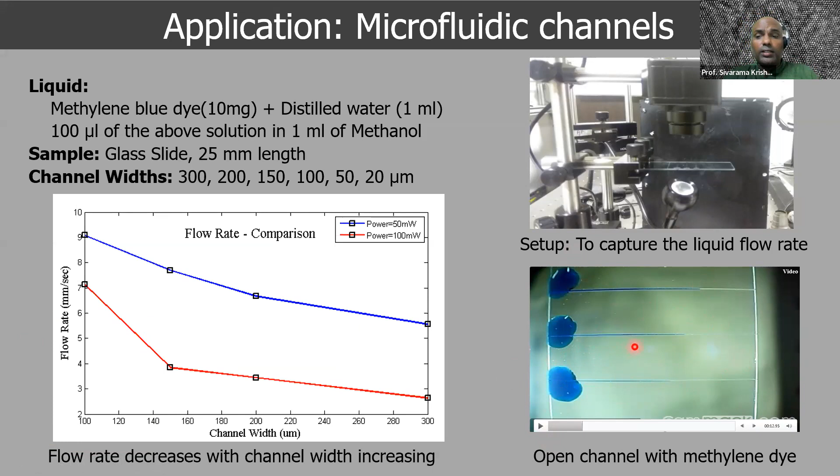But what we did was to color distilled water with methylene blue, and then make it flow through different channels of different widths. You can see there is a nice capillary flow through these channels, and we hope to exploit this in the near future.

Now, in as much as we can make fluids flow, we can also look at the wettability of these surfaces before and after interacting with laser. There is sufficient evidence to believe that we can tune laser conditions to texture a surface and make it either hydrophobic or hydrophilic, and this is done using contact angle measurements.

In this one-off study, we measured the contact angle after ablation and found it becomes more hydrophilic for the conditions we worked in. But for contact angles greater than 90 degrees, where the droplet becomes even more convex at the contact point, hydrophobicity starts to grow, and one even gets superhydrophobicity.

Indeed, other groups have shown that just by femtosecond laser processing of silicon, one can even induce superhydrophobicity. Our goal is to hopefully control this on various important surfaces, including polymers, so that we can make flat fluidic devices in the future.

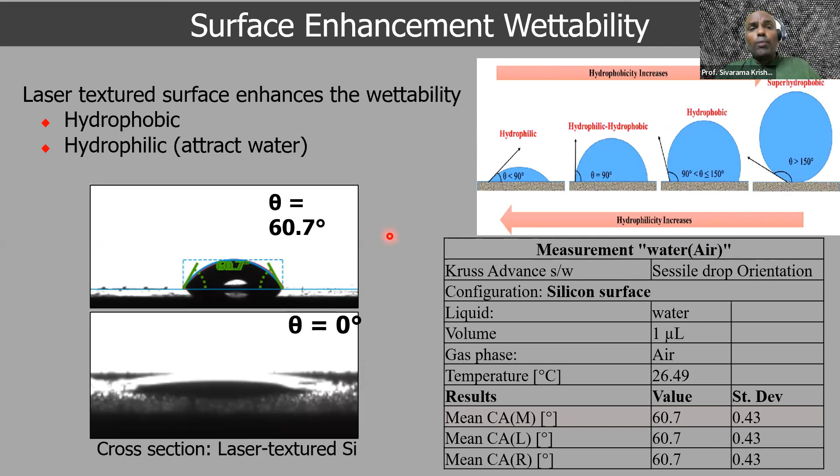Okay, so Mano had a series of successes using these techniques. Now, in the second part of this talk, I would like to showcase our interaction with industry and the real world through the work that Dr. Errol Maran, now faculty at MEPCO Schlenk Engineering College in Madurai, carried out as part of his PhD here, in part in our lab doing femtosecond and nanosecond pulse work, with his two PhD advisors, Professor Nilesh Vasa and Professor Vijay Raghavan.

The idea here is to enhance the tribological properties of as-obtained commercial tribological devices, so that we can take these industrial components, process them, and give them back to industry for real world applications. In such a scenario, one needs to carefully define the goals, both short term and long term, as to what we would like to achieve in enhancing the tribology of these devices.

Our goal is to develop processes which enhance the tribological properties of a series of devices such as piston rings, cylinder liners, even drilling bits, which we heard about in Professor Ghosh's talk, and other abrasive or non-abrasive tribological surfaces, and implement this at both high throughput and high precision.

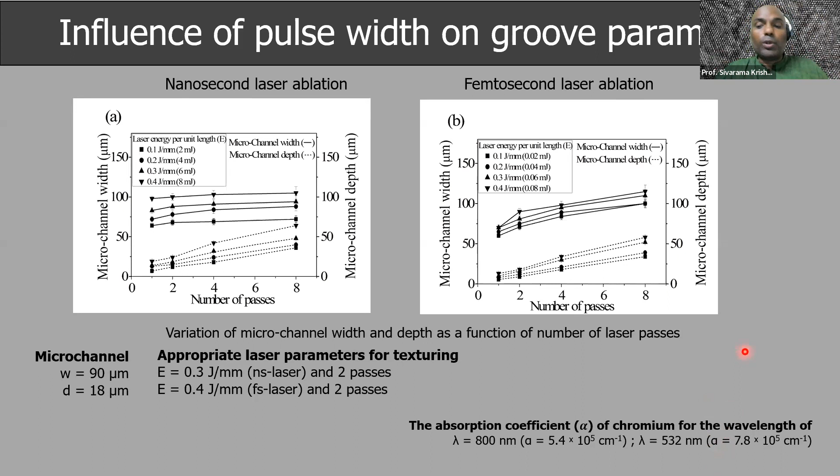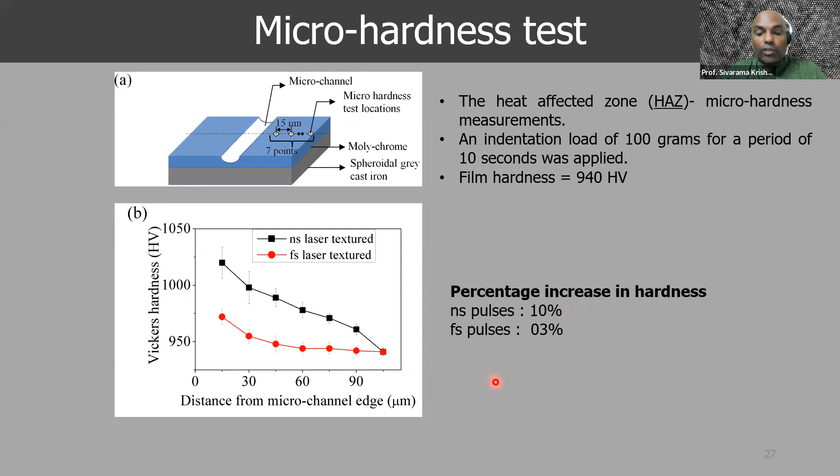Is that so? We first wanted to test the hardness of the regions where we used laser pulses, to see if there is some kind of hardening taking place because of melting and reforming. Indeed, in Vickers hardness test measurements, we found the percentage increase in hardness is 3 times in the case of nanosecond pulses as femtosecond pulses on average. This tells us the femtosecond pulses are not so damaging, although they do the extrusion of materials very well. But really, what we care about is tribological properties.

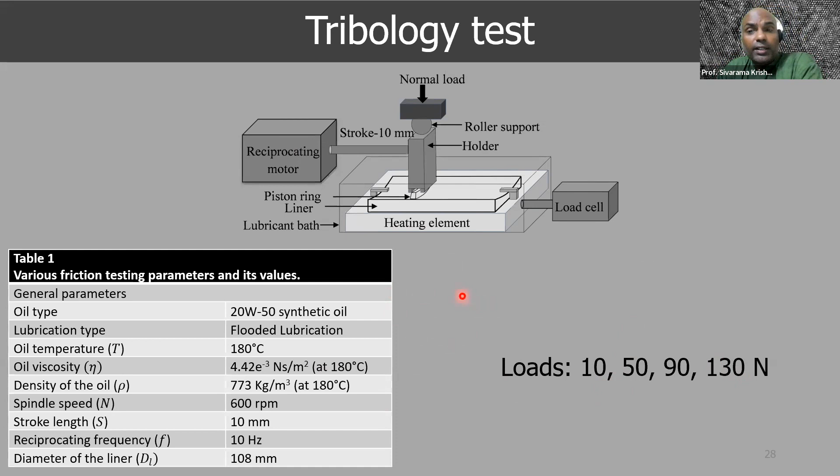So we used a reciprocating motor to measure the tribological properties at various different loads, all the way from 10 to 130 Newton. We used the same oil in both cases, for nanosecond as well as femtosecond laser pulse grooved or microstructured samples, and studied the tribological properties. That's the work of Maran.

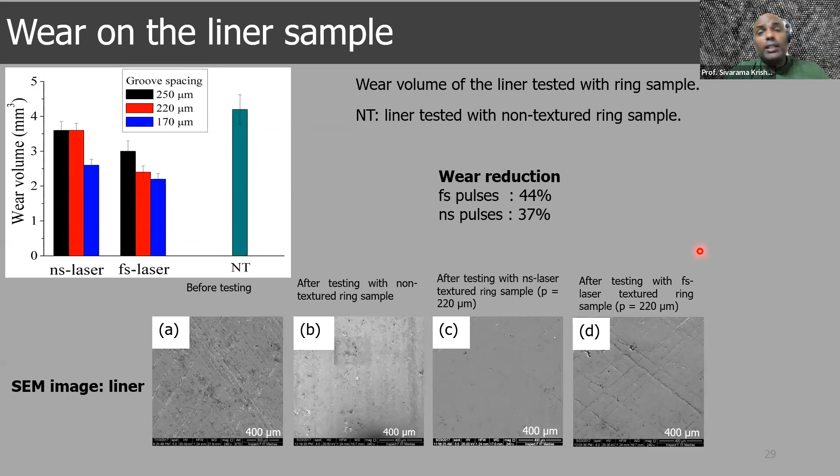Here is a very typical result which we found. For groove spacings of about 170 micrometers, the wear volume on the liner of these pistons is significantly smaller in the case of femtosecond pulses. Nanosecond pulses don't actually perform too badly; compared to the non-textured material, the textured material performs way better. But the wear reduction is much better in the case of femtosecond pulses.

So one can conclude based on these results that it could well be preferable, especially if one is going to establish a new system or industrial line, to use femtosecond pulses, which are becoming more and more robust as laser systems become more robust and their cost reduces. It may be better to choose a femtosecond laser because not only is the friction reduction better, and wear reduction better, but also residual stresses on these materials are much more reduced in the case of femtosecond laser interaction.

This is an interim summary of Maran's work. I will conclude this test case by presenting a few details on the effect of lubricant temperature on these femtosecond textured grooves. We used lubricants of 3 different temperatures, 50, 120, and 180 C, and different sliding speeds, 600 RPM all the way to 900 RPM, under a normal load of 130 Newtons.

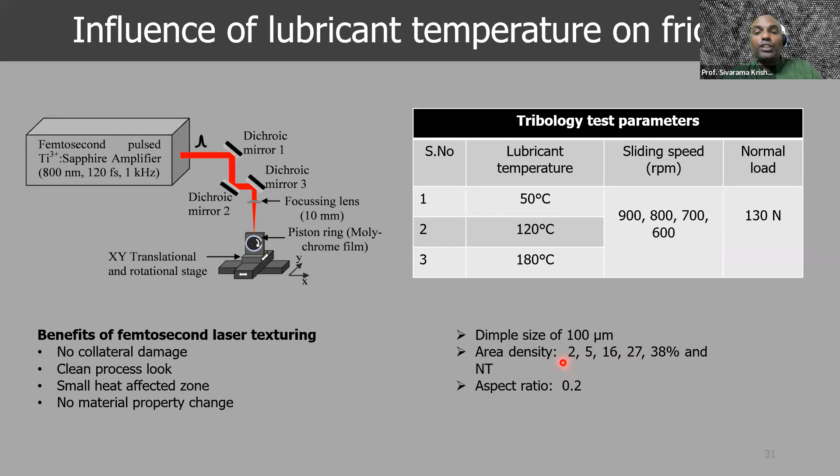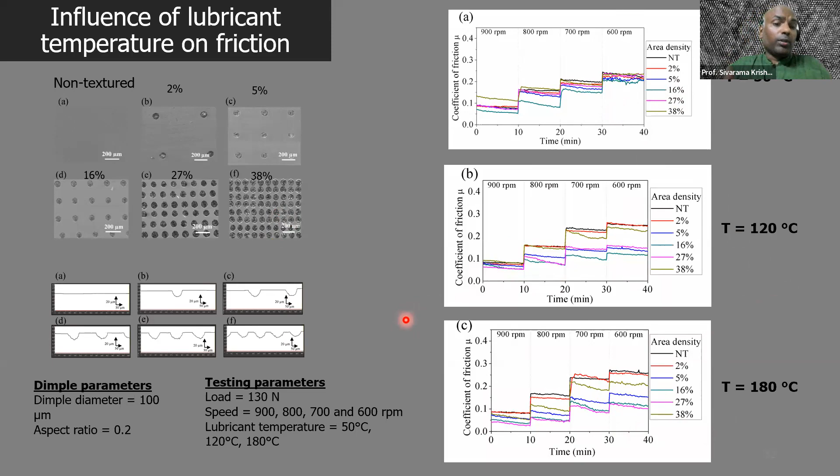We wouldn't really want them to be strongly dependent on lubricant temperature. So the performance of these femtosecond textured piston rings seems increasingly convincing in terms of being applied to the real world and to industry. That was about the study on the coefficient of friction. This is just one more representation of the same data in a different form. As compared to non-textured samples, the textured samples indeed performed better.

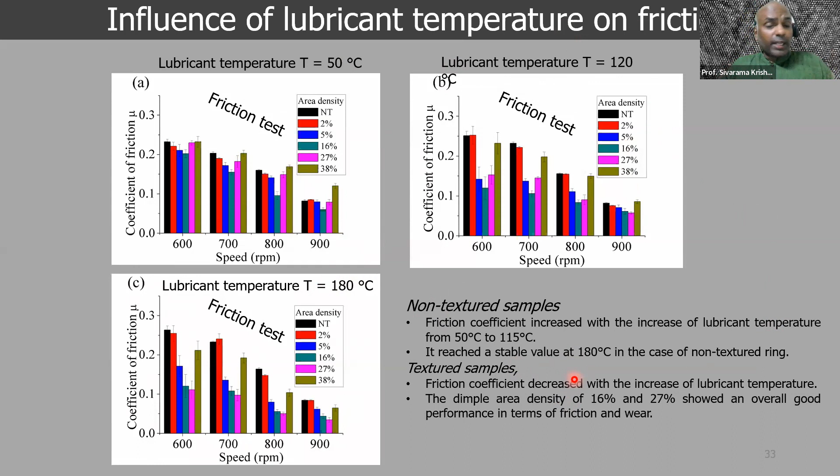Therefore, we rest the case that this kind of texturing with very low thermal burden and debris is indeed a very nice idea.

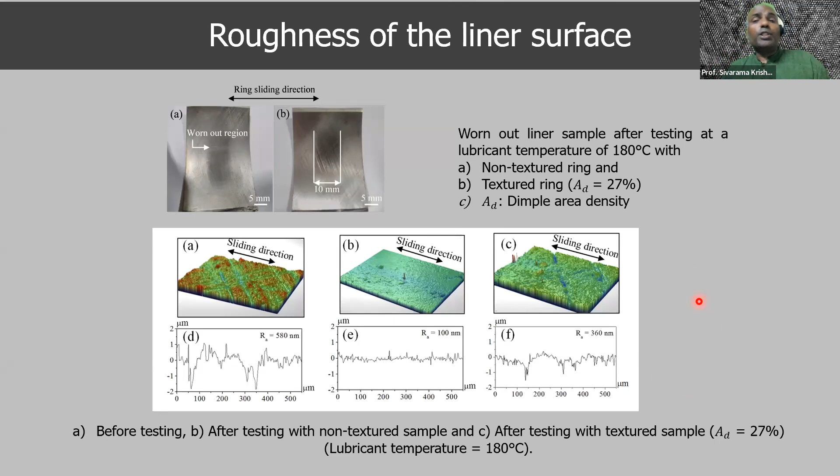We also measured using non-contact optical profilometry, getting a direct measure of the roughness of the surfaces, especially the used surfaces after the test. We measured their roughness and wear, and it's clear that both the dimpled surface and the liner I'm showcasing here were much better with higher groove densities when we used femtosecond laser pulses to texture them. The wear volume of the liner was also measured, but in the interest of time, perhaps I shouldn't elaborate too much.

We could discuss this in our question and answer session. But hopefully I have made a strong case to convince you that playing with pulses and using pulse lasers is a future direction for these studies.

We would like to not just stop at academic or research labs, but translate this to industry. As I said, we are working with our industry partners, India Piston Limited, and more recently with CUMI, which is Carborundum Universal, and Mahindra and Ashok Leyland, which are prominent automotive manufacturers in India, especially through the good offices of Professor Arunachalam, who has himself incubated a company involving diamond membranes and devices.

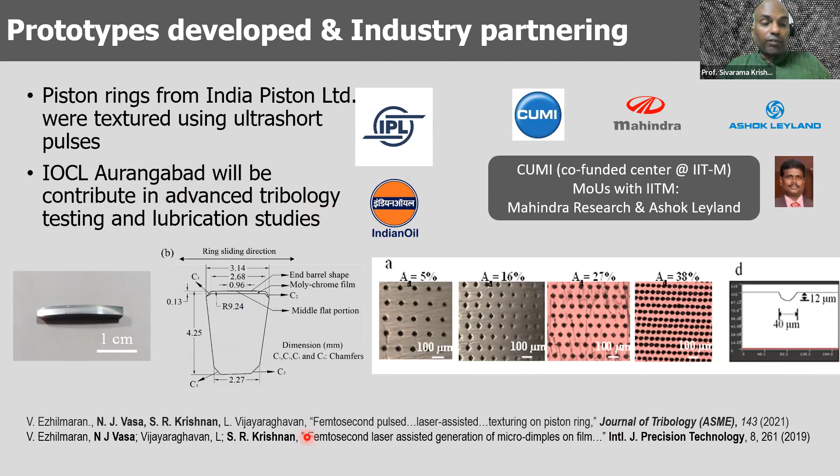We will continue our studies on piston rings and collaborate with Indian Oil, which are lubricant manufacturers apart from being petroleum vendors, to take this forward and interact closely with industry, which is really the goal of this research.

Hopefully we will be able to meet the deliverables that our partners and funding agencies want, which is excellent micro texturing with a lot of control and precision, meeting global standards and keeping to important specs in terms of feature sizes, reducing friction and enhancing mean time between failures, benchmarking them, keeping them cost effective, keeping devices indigenous, make in India, and at Indian costs, hopefully a tenth or more reduced in terms of indigenous versus imported cost ratio.

If we do this, not only will we add to the technology and economy on the Indian firmament, but also address what is becoming increasingly important: global energy consumption, especially in the automotive sector. This will have an impact on reducing fuel consumption, whether oil or batteries, and helps make our devices and automobiles more efficient.

But then the physicist in me wants to reaffirm that at the heart of all this is some very exciting physics which happens on femtosecond or picosecond time scales. Some of this was recognized by the first Nobel Prize given for femtosecond light-matter interaction in 1999, to Ahmed Zewail. Physicists have toiled before and after this, and continue to toil now, to understand better how these pulses interact with matter.

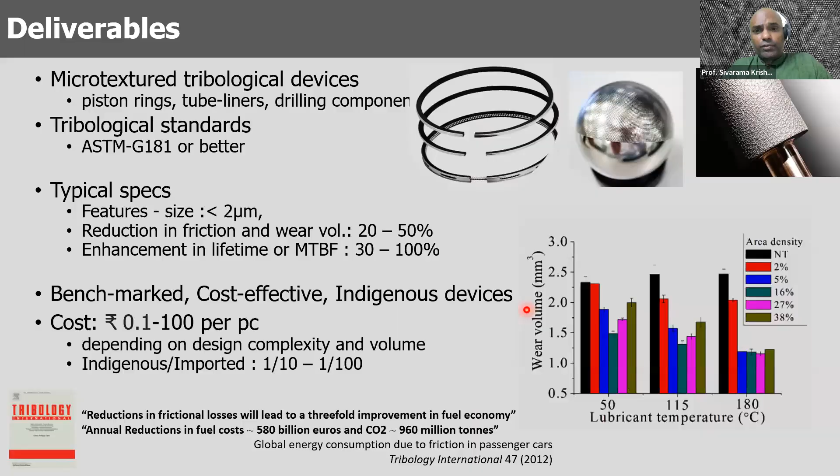So in an optical fiber, light is guided by the fact that the core of the fiber has a refractive index larger than the cladding, and this very high school phenomenon of total internal reflection tends to guide light rays. For Indian students, you may be delighted to know that the father of this technology was an Indian American, N.S. Kapany, who sadly passed away recently, but there is a nice biography of him in Nature. This phenomenon is very nice, and one can indeed use this to write waveguides.

But what I did not describe was other types of waveguides called type 2, where you can use other tricks to do waveguide formation, indeed with femtosecond pulses, to modify refractive indices in situ. Even more complex photonic structures have been demonstrated. So you can guide light, but the question was about micro lenses.

Yes, indeed, when you can modify refractive index in a very precise way, you can create lenses. People have done that. In fact, we would also like to make some of these so-called solid immersion optics using femtosecond laser pulses. But there may even be a set of hybrid approaches, nanosecond or excimer, and then femtosecond may also work better. Who knows? But certainly with these techniques, it's good.

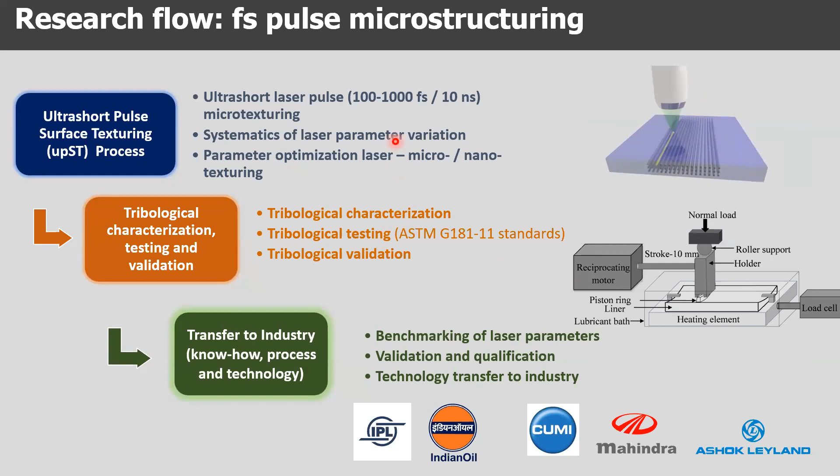So thank you very much for your wonderful presentation. Now I would like to invite other panelists to join me to say a few things. First, I would like to invite Professor Samuel, because this is a wonderful initiative. You formed a Center of Excellence to use very advanced technology like laser technology, and also have some vision to help manufacturing industry in India, probably worldwide. So I would say certainly the sky is the only limit for us to use laser technology. Would you like to say a few words on the initiative and the perspective of the center?

Yeah, thank you, Professor Ling Sukong, for accepting our invitation and moderating this program. We also would like to thank Professor Amitav Ghosh and Professor Sivarama Krishnan for giving insight into the practical aspects and the fundamental aspects. It was really nice indeed. It has been very fruitful.